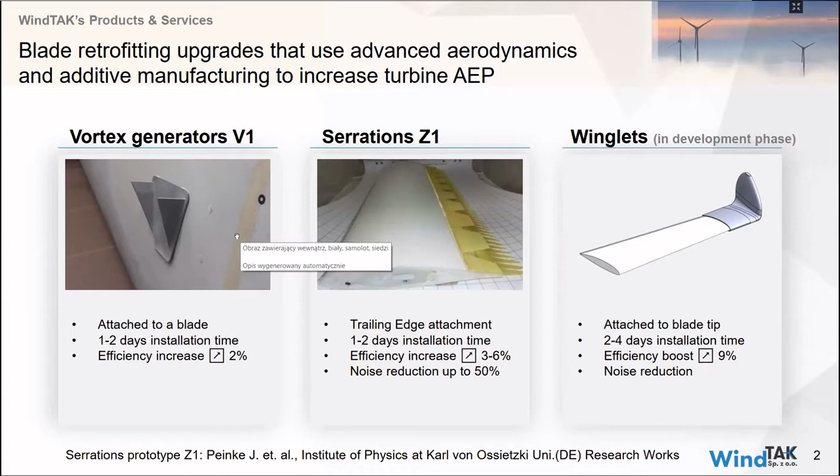Obviously, it's not easy in a country coming from the communistic era that we had right after World War II, and a completely different philosophy of development of the country. But things are changing, and you can see that the wind farms are becoming increasingly important, and we are moving towards the green energy. Obviously, there is also a push towards photovoltaics, but on a smaller scale, and the conventional steam power plants are being changed by gas-fired and combined heat cycles today.

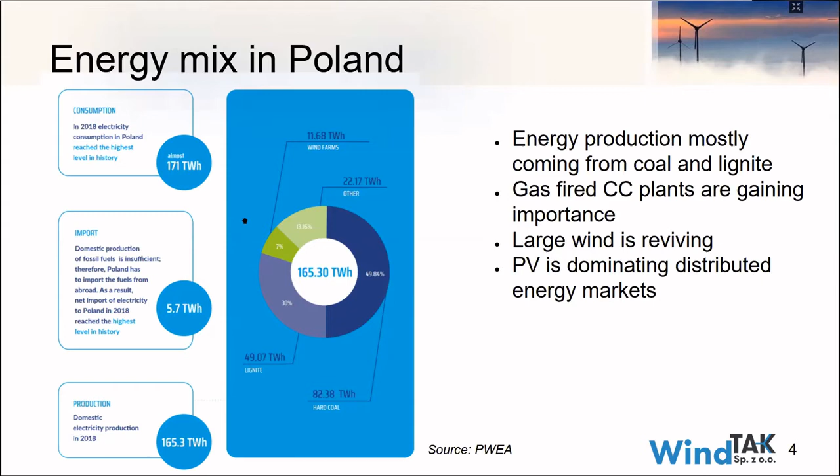As far as the wind sector in Poland, there has been a stagnation in large wind, which is defined as 500 kilowatts or more in Poland. That is because of the implementation of the Renewable Energy Sources Bill in 2016, which effectively curbed the amount of new installations, putting in place the 10H rule. The 10H rule means that you are not allowed to build new turbines within 10 times the maximum height of the wind turbine around it. So that actually meant that we stopped all the development activities, as you see in the recent 3 years presented on the graph.

The market is dominated by the Vestas turbines. These are predominantly 2 megawatt turbines, the Vestas V90 machine, very popular actually. There's some Siemens or Siemens Gamesa, which are about 13%, some General Electric, and a number of other ones close to 40%. Some popular turbines such as Enercons are also placed in Poland. And the market is back now, since very late 2018 we had the first successful wind auction. And the numbers have been just given for 2019. We are up to 6,400 megawatts after 2019, which is a big jump.

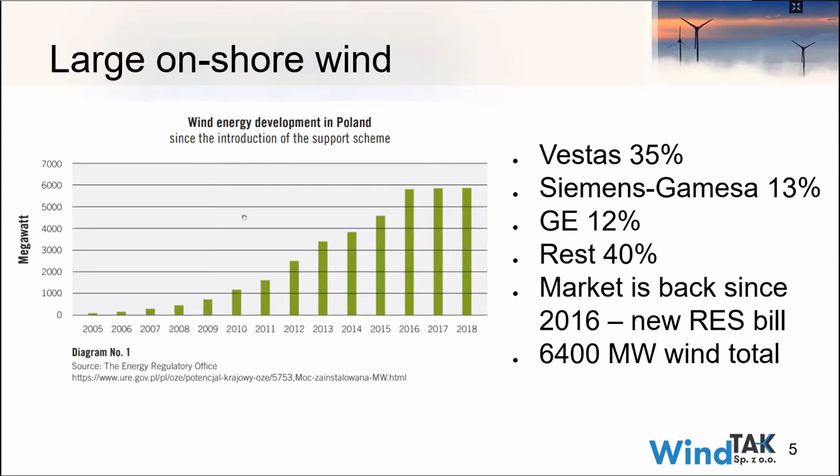The present times, I'll start with the small wind, which might be interesting for probably all of us here at the conference. But the news are not great, as you might imagine. There is not a lot happening in small wind. Small wind actually in Poland is defined as wind harvesting machines between 50 and 500 kilowatts. And there is an energy regulatory office that is obliged to collect the data on all the sources of energy that fall into this category.

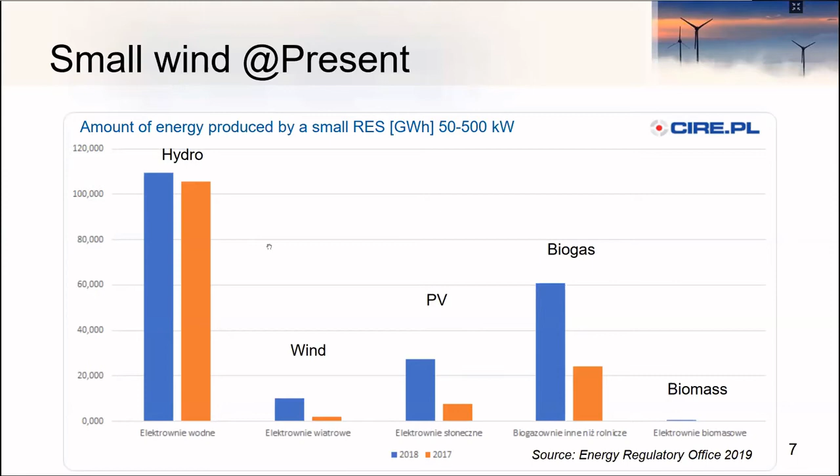And you see that wind between the years 2017 and 2018 has risen a bit, but not particularly because a lot of new installations appeared. First of all, 2018 has been a good year in terms of wind energy in Poland. And I checked the reports just yesterday, there were literally maybe a few wind turbines placed in Poland between 2017 and 2018. So that jump is not due to some massive installations, but rather the wind energy increase during that year, 2 years ago. The 2019 data has not been released, but you do see that photovoltaics is actually taking over the small capacities here, which I think is a trend observed in many other countries.

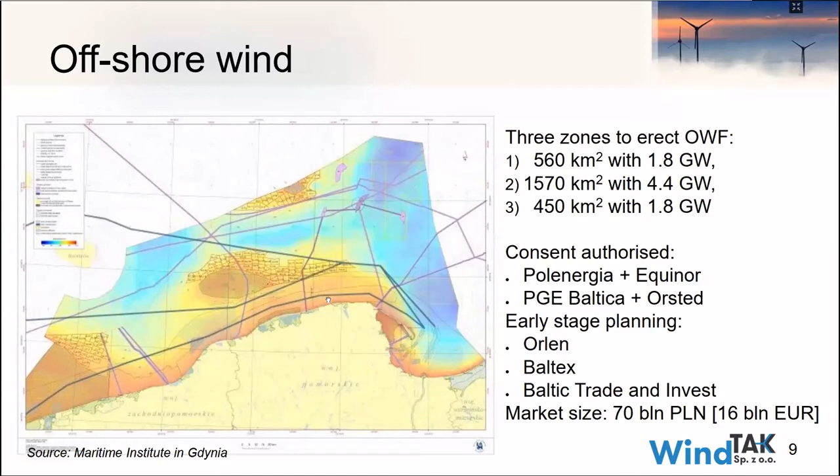But the authorized consent to build offshore bottom-fixed wind farms has been given to 7.1 gigawatts worth of projects. The biggest companies, Polenergia and PGE Baltica, are the farthest in this process, and they teamed up with Norwegian Equinor and Danish Ørsted to build these offshore wind farms. The market size is quite big, so we are seeing a big revival of that part of the industry sector at the moment, and a lot of attention from Western Europe and from other countries.

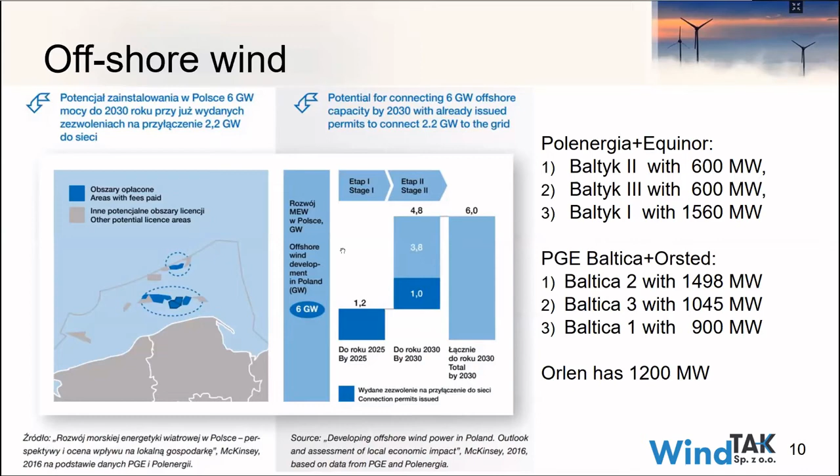So some more about it in this slide, showing exactly which offshore wind farms will be seeing development and installation as soon as 2025, and then up to 2030 some more installations will happen for a total of 6 gigawatts, with Polenergia and PGE Baltica, as I mentioned, winning the race at the moment, so to say. So far.

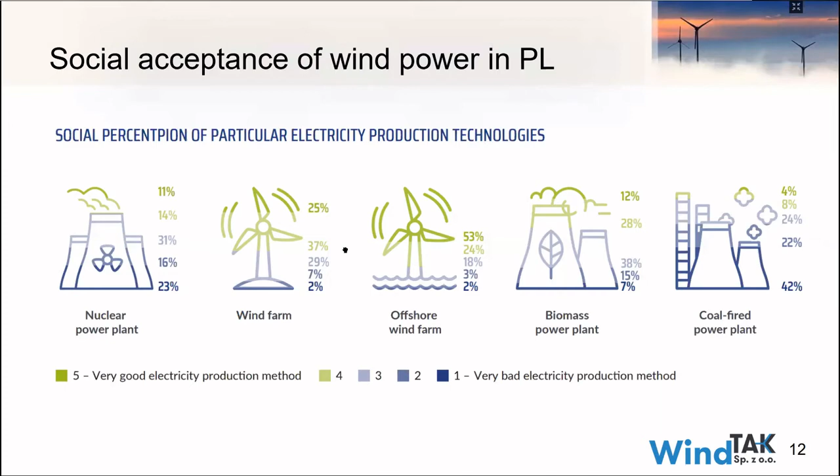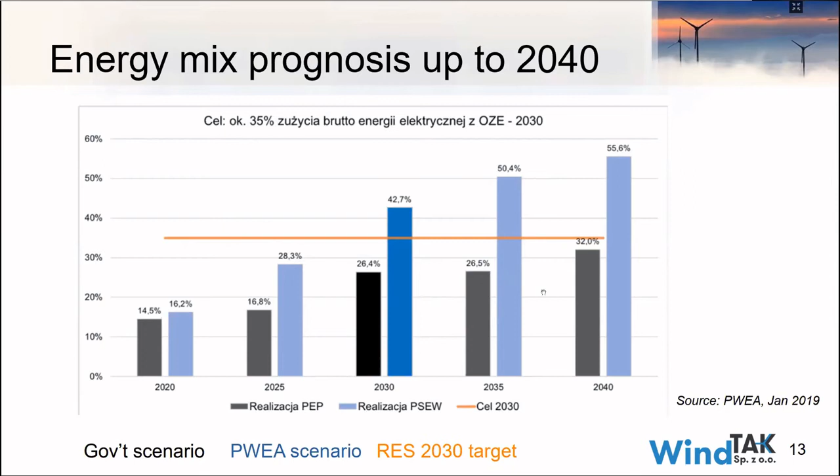So only the scenario which allows more renewable energy, more wind into the energy mix, is giving us a chance to reach that target. The government is not really so optimistic about it. They're sticking to some other energy mix forms that you can see today. So conventional power plants are not to be stopped so quickly.

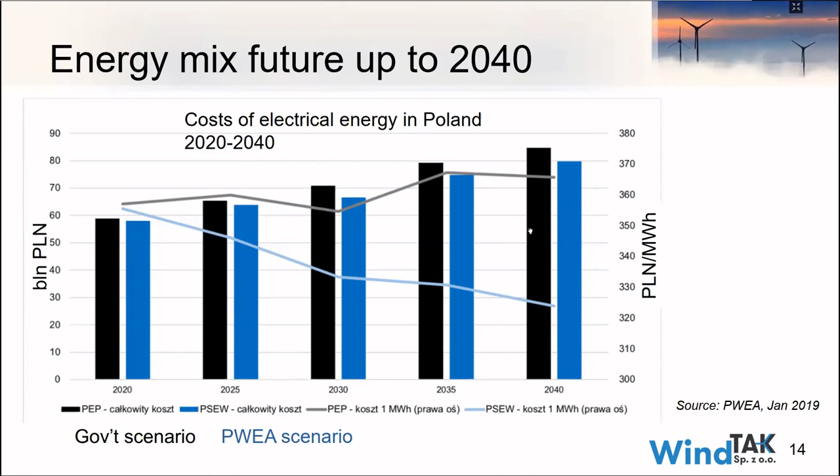Maciej, you'll have another 2 minutes. We are behind the schedule. Okay. Thank you, Morten. I'll be getting to the end.

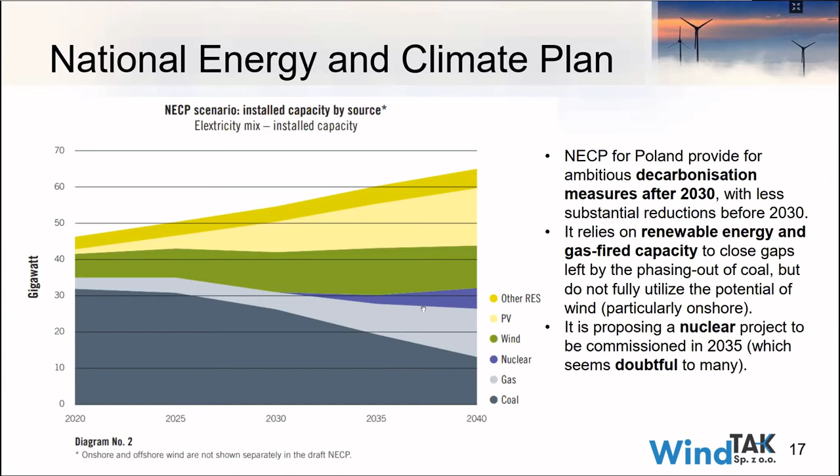So we had a national energy and climate plan. We've seen today in one of the presentations, the Polish plan looks the following. And you see that wind is increasing. This is this dark green share on the plot. But this is the wind onshore and offshore combined here. The gas and coal power plants are not to be eliminated. As you see, they will still be a backbone. We have some plans for nuclear power plants as well, but many people doubt that this will actually happen.

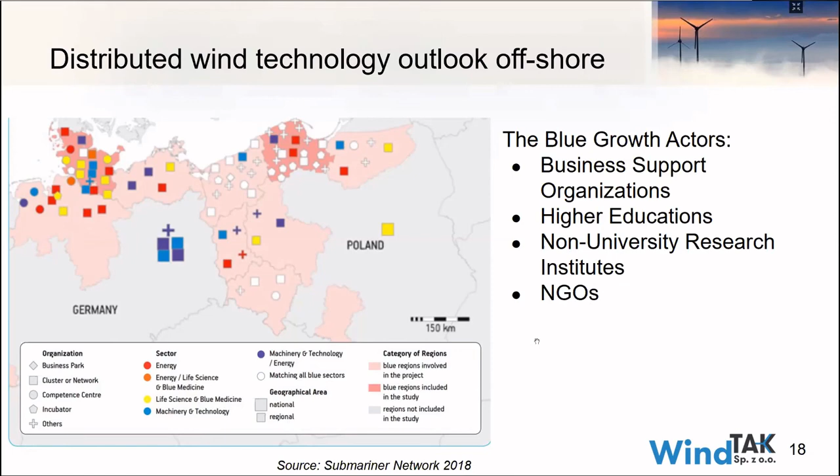And we are looking into the sector-wise development of offshore wind and distributed wind. There's been a lot of organizations, business parks, clusters, competence centers, and NGOs identified by Polish government and Polish institutions, which will be employed to work on the distributed energy technologies and offshore wind. There's also talk about distributed wind technology onshore, and that mainly concerns energy clusters. But then there's a lot of problems here that you need to look at: load profiling and hybrid energy storage.

So challenges for Poland are the support mechanism maintained in terms of auctions beyond 2021. Obviously, we are vouching for the removal of the 10H rule from the bill. Existing wind turbine generators must be permitted to be built up to 2024 with the pandemic as well. And obviously the consolidation of Polish industry to increase the supply chain for offshore. And just three more points.